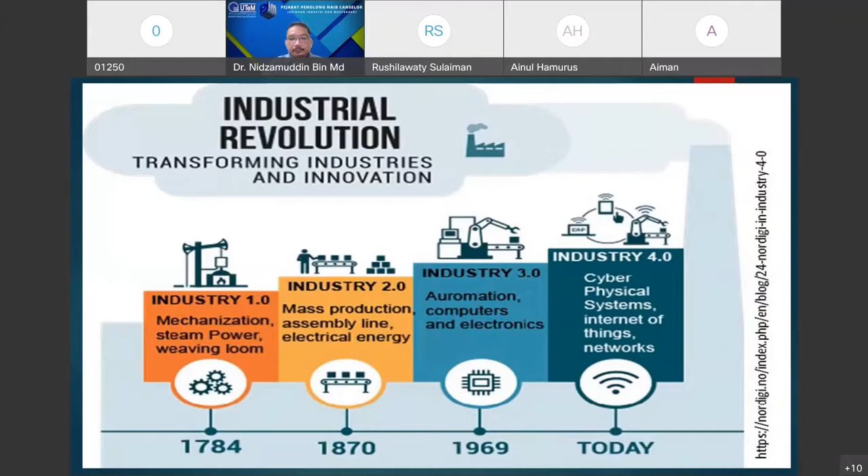Okay, before I continue, before we start this IoT gateway speech, I would like to share with you why we need this. Let's say we need all data in our manufacturing process. We have a lot of data here. So how are we going to extract these data to be used in our daily manufacturing works?

Data such as temperatures, pressure, all that needs to be extracted from our production and do some analysis and improvements. Until now, they just use it manually, and this will take time. So that's why we need something like automation or real-time data, so that we don't need to use all this manual calculating, manual analyzing.

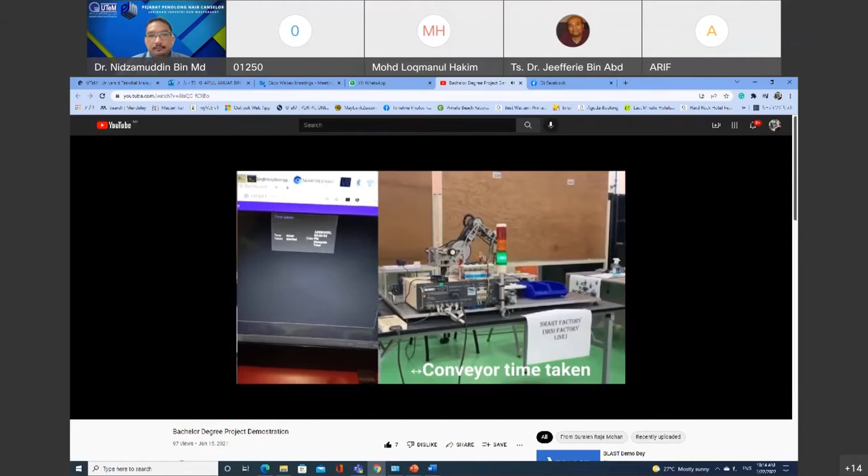When the machine placed the metal product on the conveyor, the timer turned on, and we can see at the Node-RED dashboard the timer has been turned on. When the metal product tapped the second sensor, the timer turned off and showed 4 seconds for the time taken for the product to move along the conveyor.

The machine is now going to place the plastic product on the conveyor. When the plastic product is placed, the conveyor won't move, so it indicates the yellow light on the tower light of the machine, and this can also be seen on the Node-RED dashboard and MQTT dashboard.

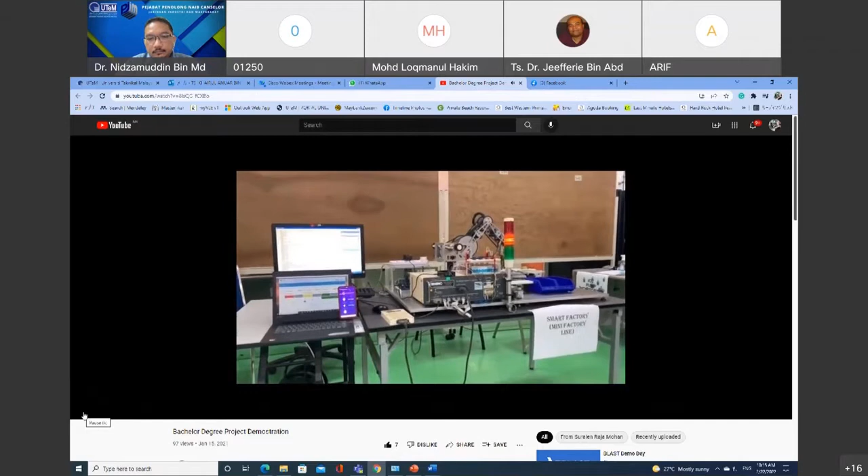When the yellow light is turned on the tower light, a technician or engineer is able to know that a non-metal product is being detected and needs to be placed in the non-metal product box.

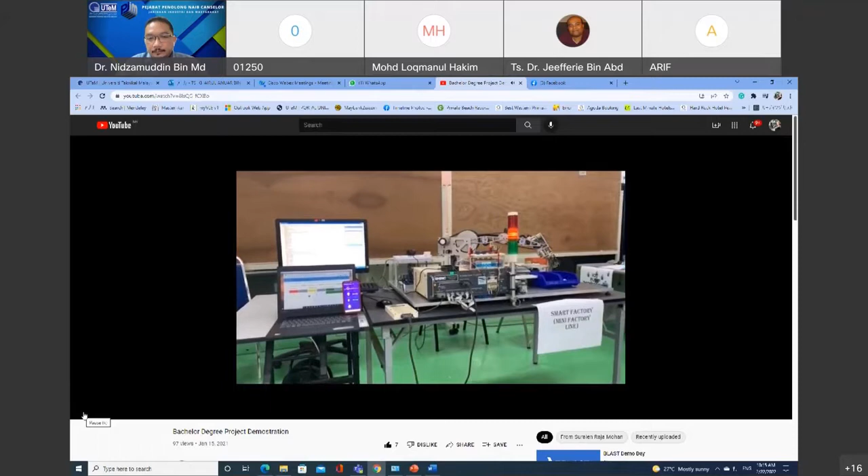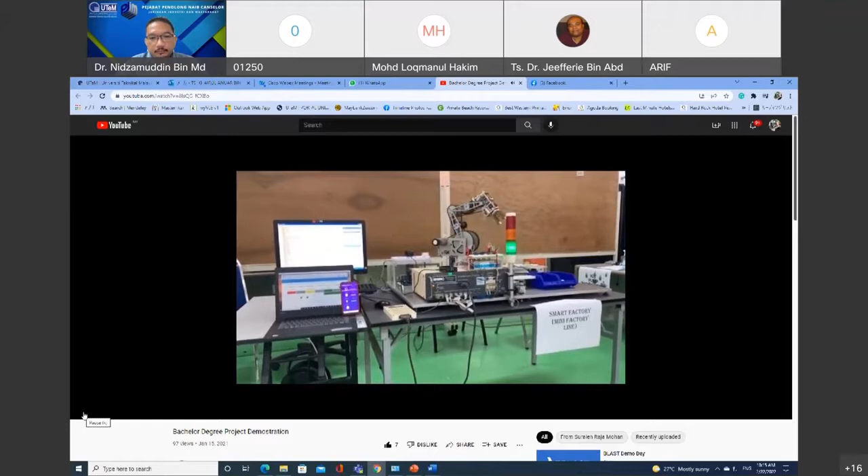After the non-metal product has been placed in the non-metal box, the machine will continue its progress. The green light will turn on, and we can see the green light has also turned on in the machine, the MQTT dashboard, and the Node-RED dashboard.

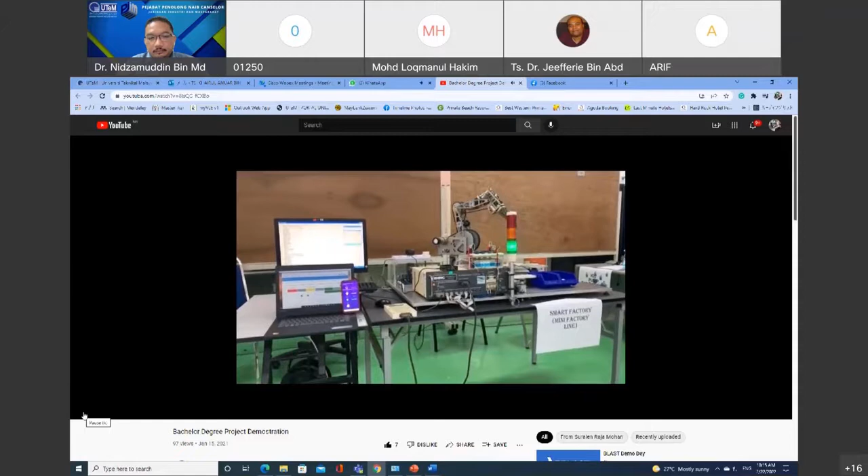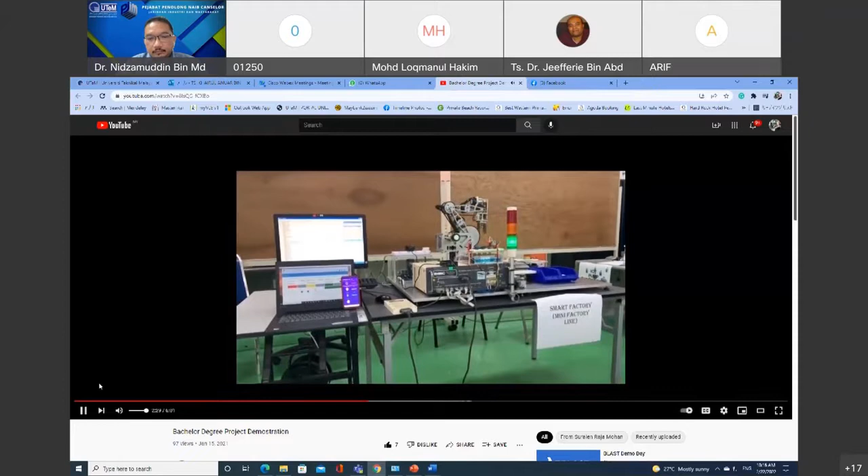If there is no product detected on the conveyor, the machine will go back to the home position and the red light will turn on, and this can also be seen on the MQTT dashboard and Node-RED dashboard.

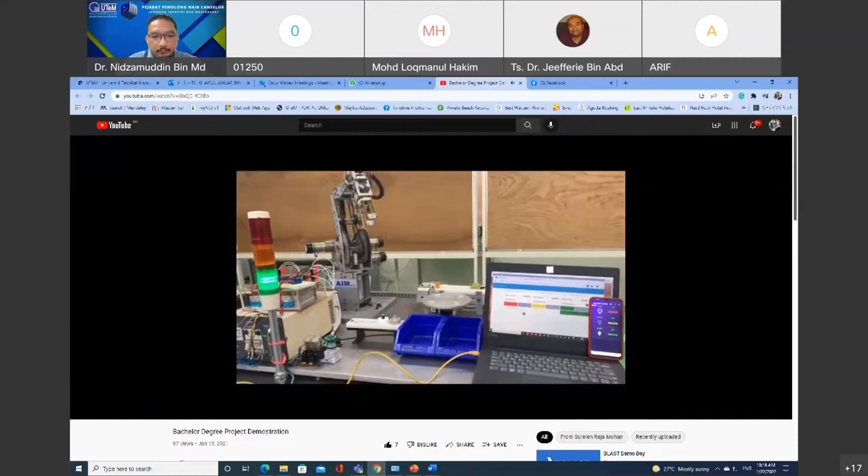Now we see a nearer view of this project demonstration. We have given the input to the machine and the green light turns on, which can be seen in the Node-RED dashboard and the MQTT dashboard.

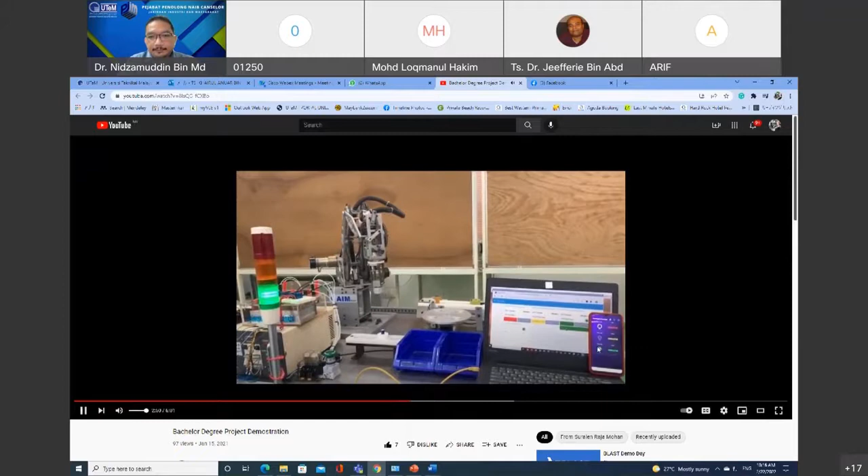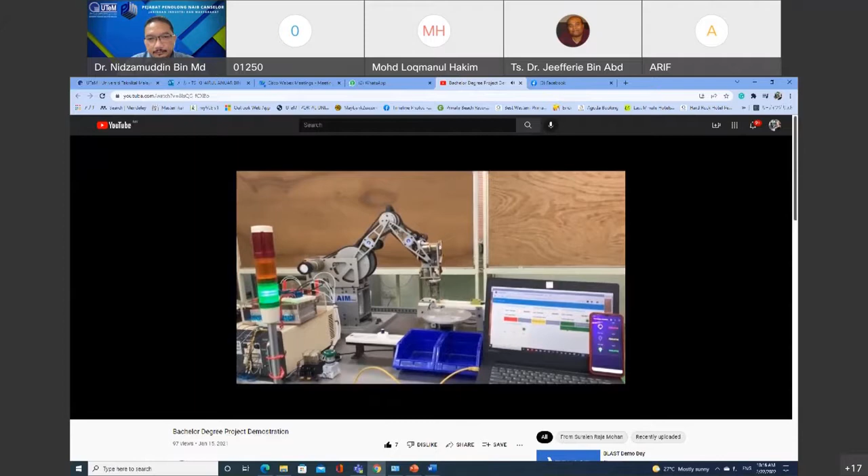The machine is going to place the metal product on the conveyor. The first sensor detects the metal product and the conveyor moves, and the second sensor detects the product and the conveyor stops.

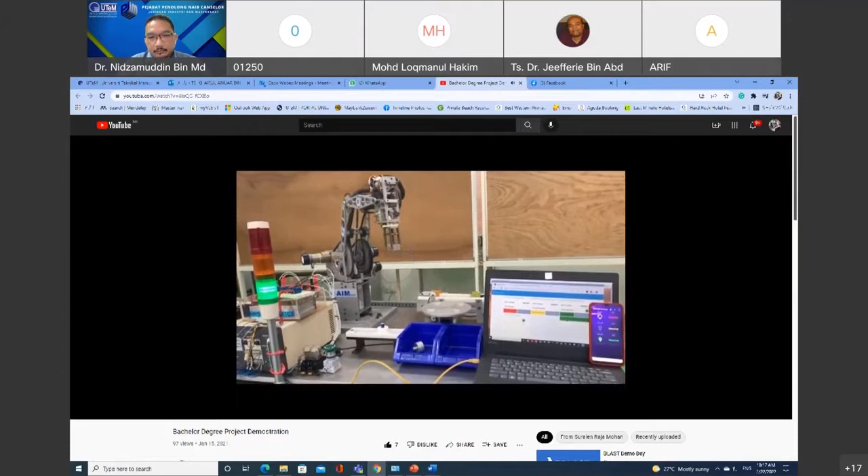Okay, ladies and gents, this is the simplest way that we connect machines through Raspberry Pi 4.0, which connects to the sensors in the input and output I/O port, and then connects to this Node-RED dashboard, connected via Wi-Fi to the cell phone, and an application on the cell phone, the MQTT application.

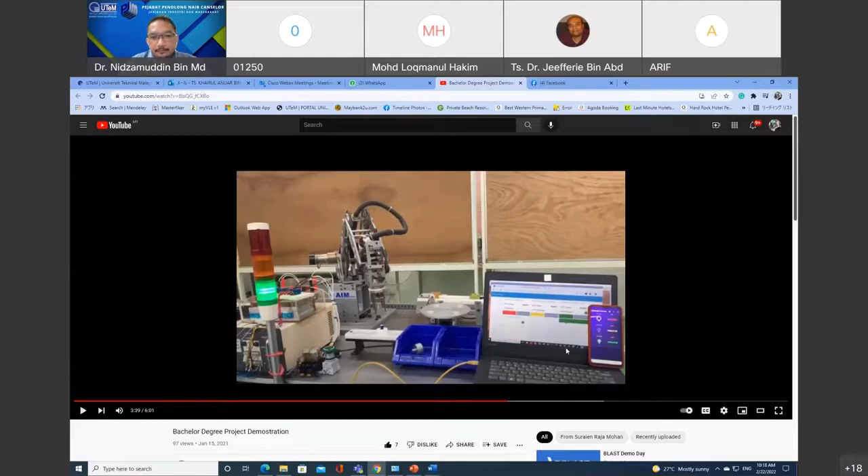So the software that we are using is called Node-RED. It is actually an open software, so we can find it and download it on the internet. But we still need to learn how to program it.

These students learn how to program it and how to connect all the hardware and software so that they can extract the data. So it's not just this data.

This is very simple data, such as the time taken for the robot arm to put the metal component on the conveyor, and the time the conveyor starts to move until it stops. So they're collecting this data, but they collect it real time, automatically captured by the software inside the computer.

So we can real time extract the data. We can also real time see the graph from this, what you call, dashboard.

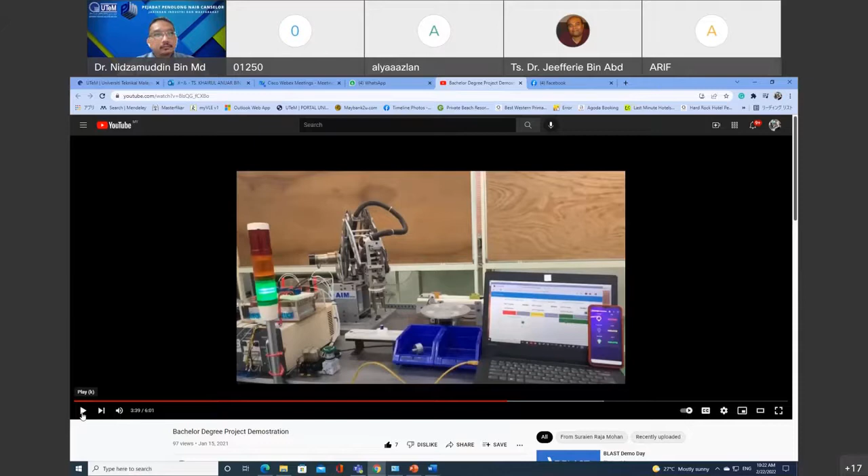Okay, now the robot is going to place the plastic product, which is a non-metal product, onto the conveyor, and we can notice the conveyor won't move because that is a non-metal product. It is not suitable for the next production process, so the robot needs to eliminate or remove the non-metal product to the non-metal box.

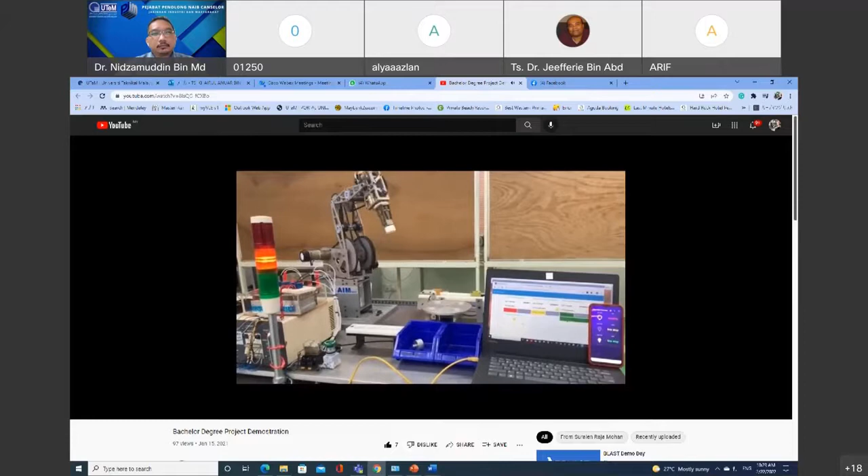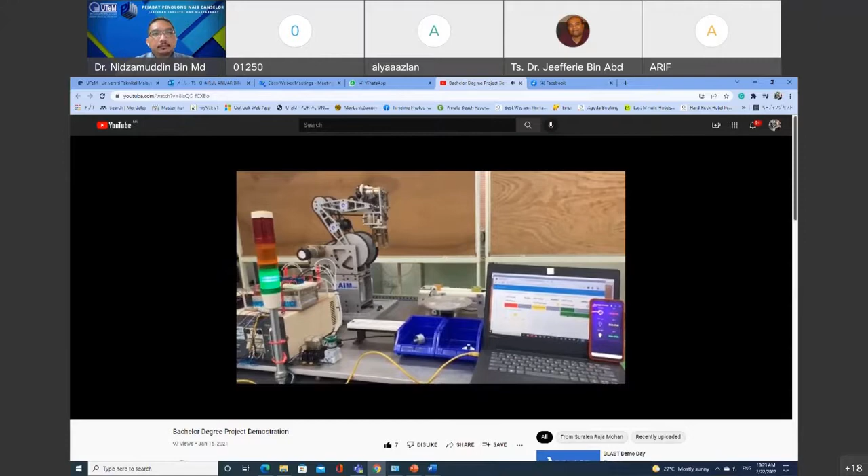And this indicates the yellow light, which we can see in the Node-RED dashboard and MQTT dashboard. So after it has been removed to the non-metal box, the machine will start to operate back to normal, and the green light will turn on, which can also be seen in the MQTT dashboard and Node-RED dashboard.

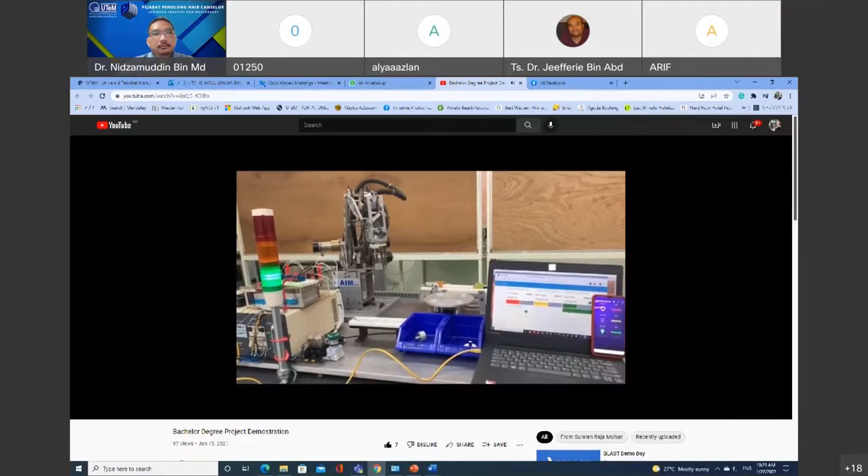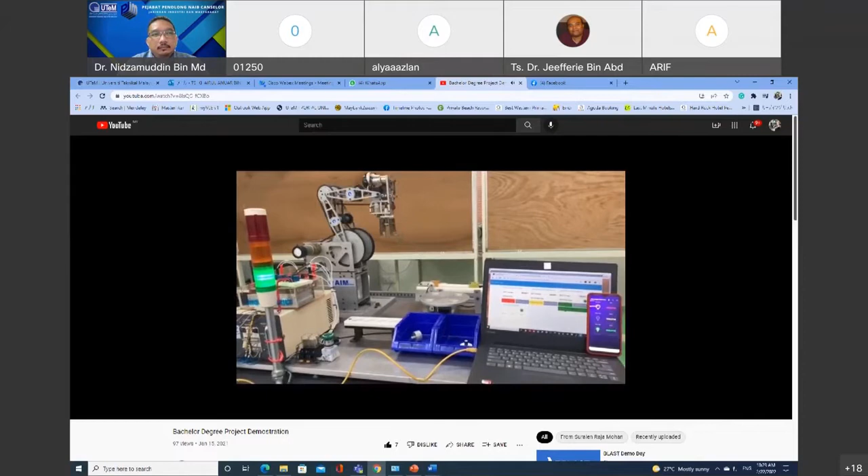So here we can see there is no product that has been picked up by the robot, so there is no product placed on the conveyor. So the robot will go back to the home position and the red light will turn on. This also can be seen on the MQTT dashboard and MQTT application.

So the data that has been taken from the conveyor will be stored in the Raspberry Pi Excel document. So we can see the data has been stored in the Excel document in the Raspberry Pi. This can be used for further analysis.

My project was also involved in the Digital Innovative Museum, UTeM exhibition.